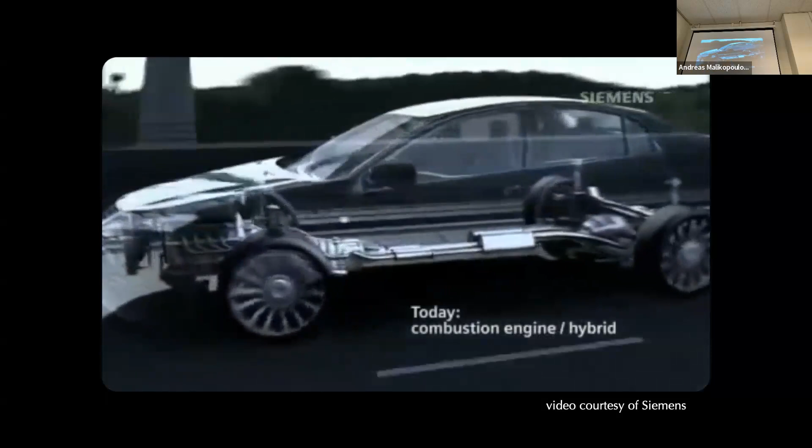The world is changing, and one sector undergoing significant transformation is transportation. We're about to depart from conventional vehicles with internal combustion engines and move to electric vehicles with electric motors and batteries. This transformation provides several challenges and opportunities.

For example, we need to update our current infrastructure with charging stations, and coordinate the increasing demand of electricity to charge electric vehicles. We also have the opportunity to integrate electric vehicles with commercial and residential buildings so we can create off-grid buildings.

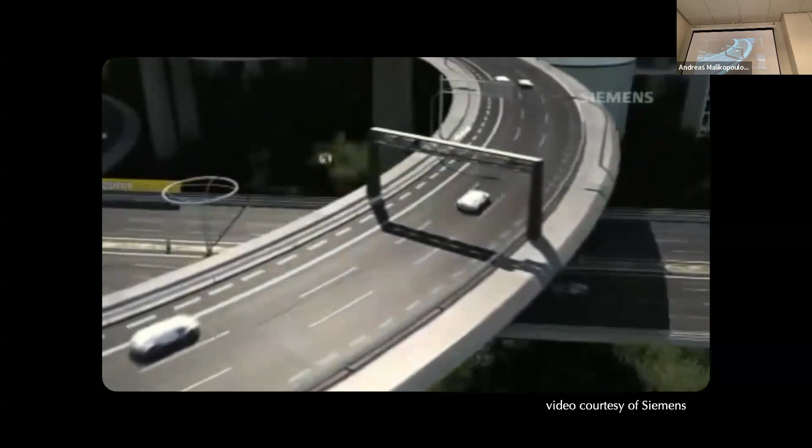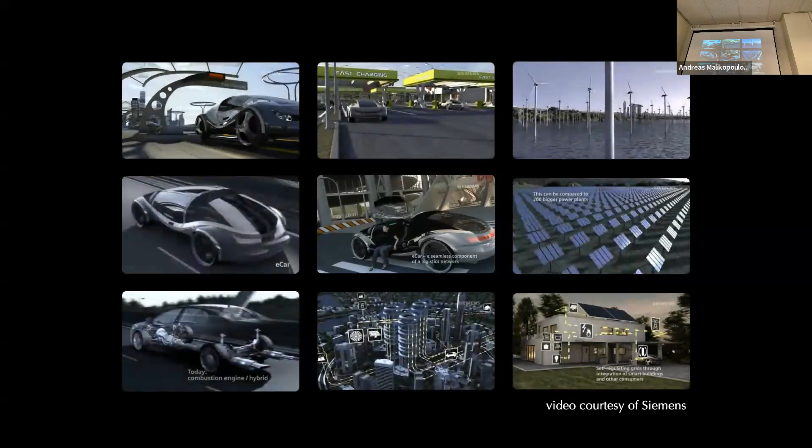At the same time, with connectivity and automation, we can use shared information across vehicles and coordinate them in scenarios like intersections, emergency roadways, and speed reduction zones, improving transportation efficiency and travel time. All these applications share a common theme: there is a cyber component, or information, that we can use to control the physical entities - the vehicles. So essentially we're dealing with cyber-physical systems.

Now, somebody might ask, why focus so much on transportation? Well, in 2017 the US consumed on average 19.96 million barrels of petroleum per day, and transportation accounted for 71% of that usage. This is enough to fill up the Empire State Building over two times per day, just to propel vehicles.

So you can see the impact of transportation on energy, and how we can address this by creating a more sustainable environment. Hopefully, with connected automated vehicles, we have the opportunity to coordinate vehicles and improve transportation efficiency, improve travel time, and come up with a more sustainable mobility system.

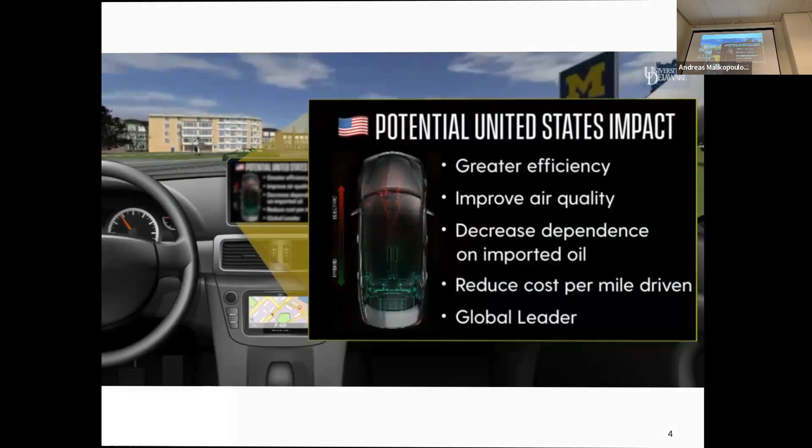So what I plan to do today is go over some automotive and mobility related applications I've worked on in the past using learning techniques and model-based control techniques. Then I will highlight some of the challenges I encountered, and some of the cons. At the end, I will have a few slides to briefly touch on how we can potentially combine learning and control to address these challenges.

Before I get to the technical talk, let me acknowledge the contributions of my students - some of them are here, and some of them are online, I guess.

In the IDS lab, we develop frameworks and algorithms that can make cyber-physical systems able to realize the optimal operation while they're interacting with the environment. In particular, we're focusing on applications related to smart cities, mobility, socio-technical systems, and so forth.

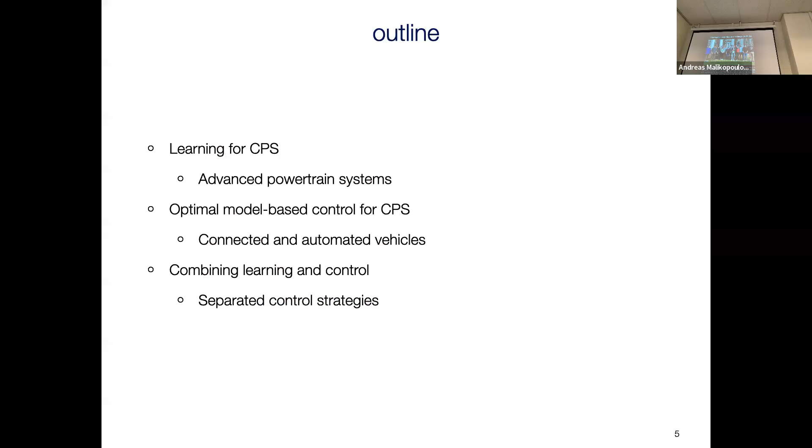To validate some of the concepts we're working on, we have developed a scaled smart city, 20 by 20 feet or 6 by 6 meters, with robotic cars on a scale of 1 to 25. We use this scale testbed to prove concepts related to transportation, how we can coordinate vehicles, and develop first-last-mile approaches.

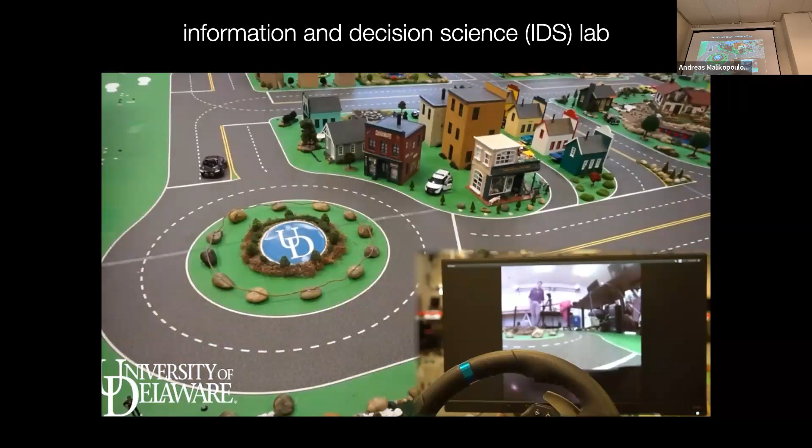We have also integrated driver emulators in our cars, so we can drive the cars inside the city and have a mixed traffic environment with human-driven vehicles alongside connected automated vehicles. We have located sensors and cameras ahead of the cars, so the driver can drive the vehicle and see what's going on through the camera. This is a nice testbed for doing that kind of testing.

We also have several drones that can coordinate with the ground vehicles, letting us explore other applications involving collaboration and cooperation between ground vehicles and drones.

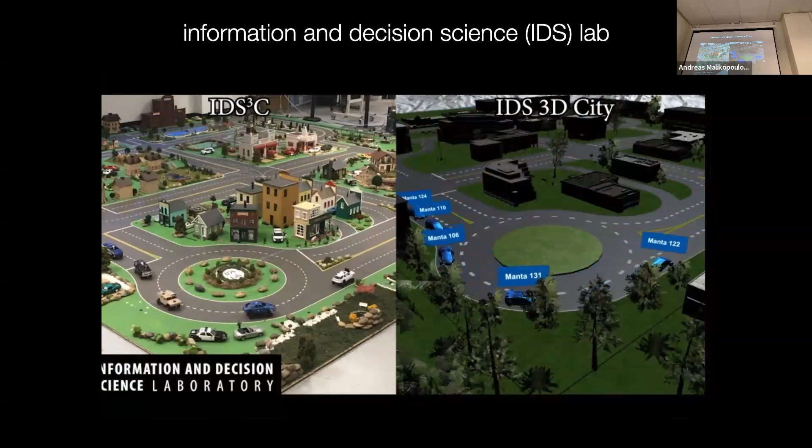We also built a digital twin of this testbed during the pandemic when we didn't have access to the city. My students built this environment in Unity where people can share and develop their approaches. Once an approach becomes mature, they can run a physical experiment in our scale city.

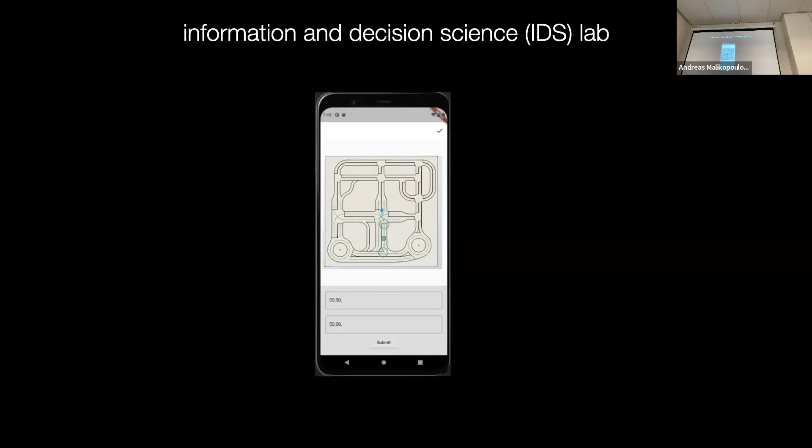We also built an app using students from the computer science department and senior design. They built this app so we can mimic a shared mobility approach in our scale city: we can call a car, it comes to an artificial origin, and we assign an artificial destination. This validates some of the eco-routing work we do in the lab.

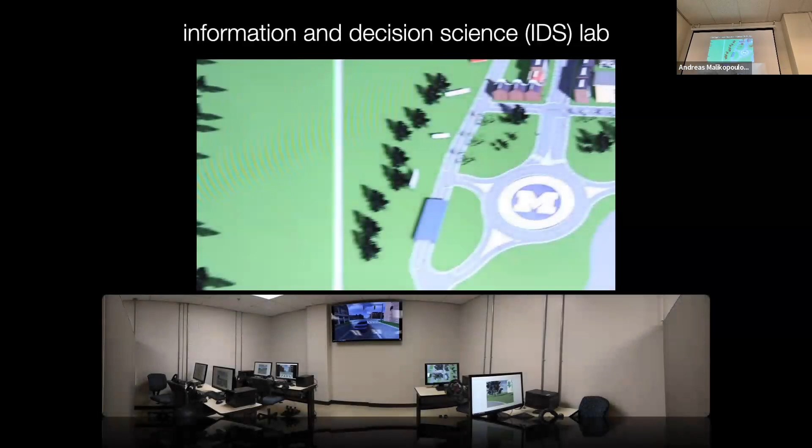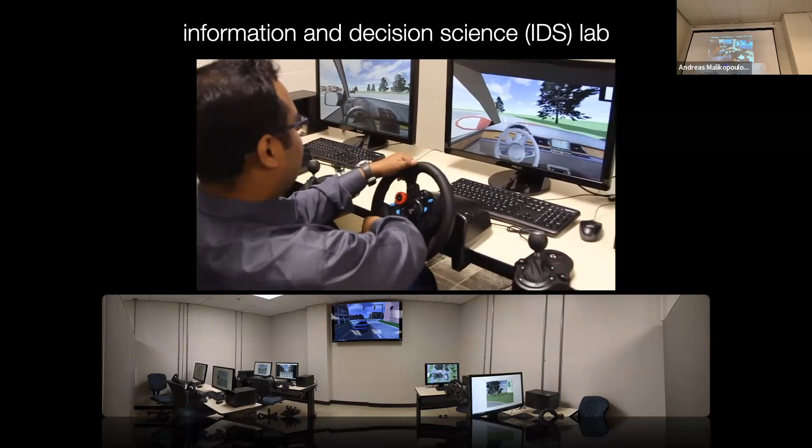We also have a driver simulation testbed with six driver simulators that use commercial software like PreScan, VS Sync, Carla, and others to do some of this work. This is essentially the starting point in the lab—this is where we start—and once we prove concepts, we move to the scale environment.

So with that, let me get back to the technical work. I've been working over the last several years in different aspects of transportation.

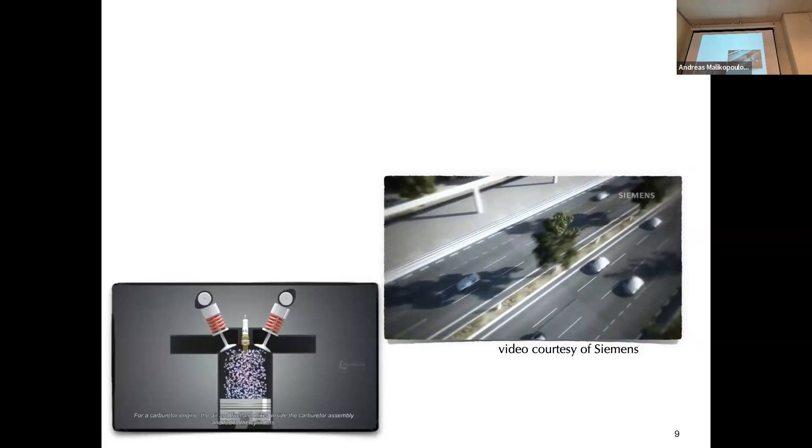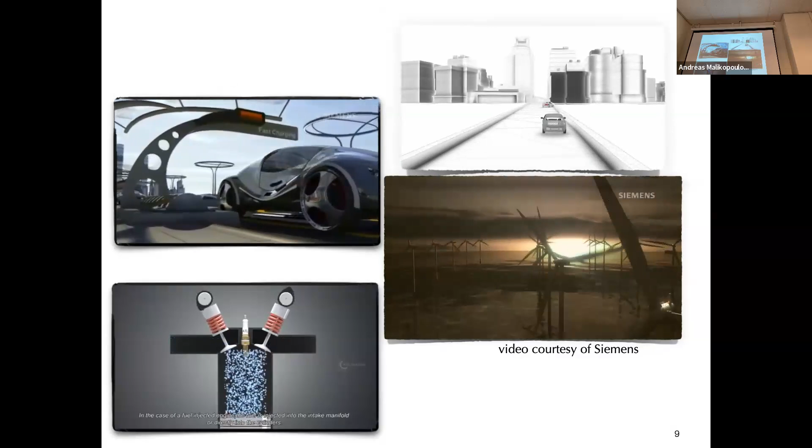I started with my dissertation on how we can make internal combustion engines able to learn the optimal operation with respect to the driver's driving style. Then I moved on to power management control for hybrid electric vehicles and plug-in hybrid electric vehicles. Over the last 12 years or so, I've been working on connected automated vehicles and how we can use shared information to do better control and improve transportation efficiency and travel time.

So what I'm going to do today is walk you through my journey, starting from my dissertation, highlight some of the challenges across these areas, and give you some insights about how we can address these challenges.

My journey started in 2003 when I landed in Detroit to start my graduate studies in Michigan. It was about 11 inches of snow, so the first thing I had to do was buy long johns in Michigan and settle in for the winter weather.

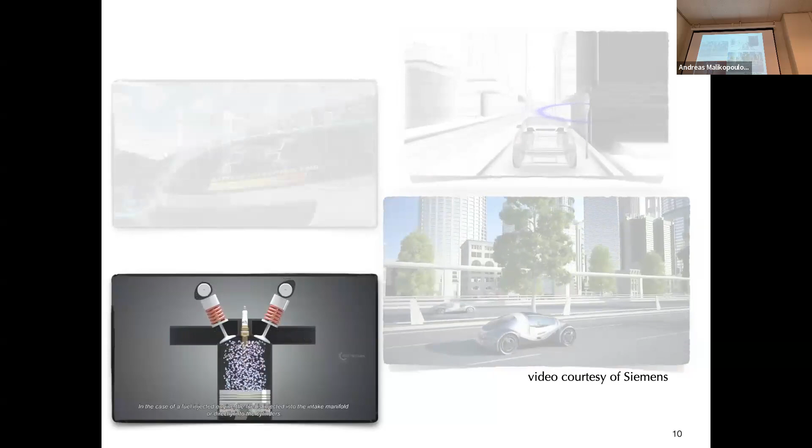The second thing I had to do was find an interesting problem to dig into and identify for my dissertation. So I was reading several articles and journals to identify an interesting problem, and I came across a common question at that time.

Why can't you achieve the miles per gallon posted on the window sticker of our cars? Everybody was complaining about why they couldn't achieve the fuel economy they were supposed to get with their car. I thought this would be a very interesting problem, so I started working on that.

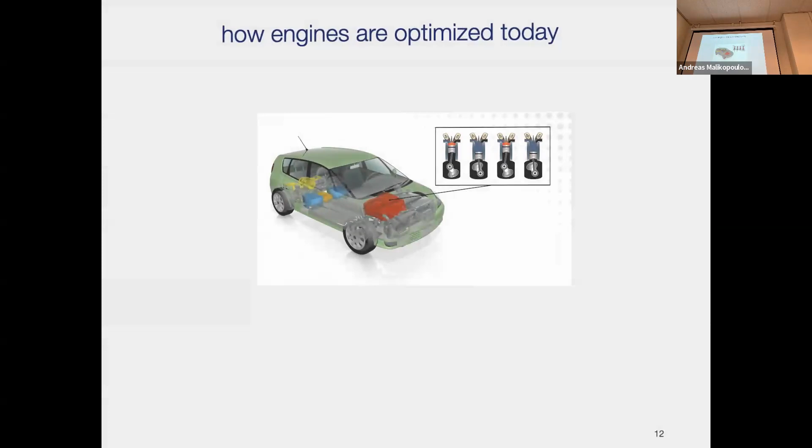To understand fuel economy in vehicles, we need to look at the engine operation. When we buy a vehicle, it comes with a window sticker indicating the fuel economy for city driving and for highway driving. Although we can always get the fuel economy for highway driving, we can barely get these fuel economy estimates for city driving. Let's see why this is the case.

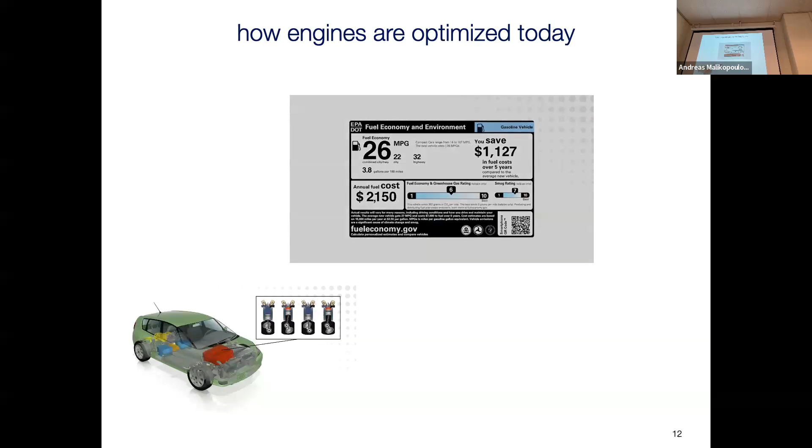So the lower the value, the better, because the lower the fuel you consume, the more power you get. This BSFC map is given with respect to engine torque and engine speed. I'm sorry the fonts are a little small, but hopefully you can see.

The way these are designed, the BSFC map is made by the OEMs: they take the engine operating domain, engine torque and speed, and discretize it into a finite, usually small number of steady state operating points. Steady state means we operate the engine at constant torque and constant speed.

As they operate the engine at steady state operating points, they fine tune the different variables of the engine: injection timing, spark timing, VGT, EGR, whatever is available. Then they take this map and put it in the electronic control unit of the engine, and as we drive the vehicle, we interpolate the values corresponding to these steady state operating points. This is how we control engine operation.

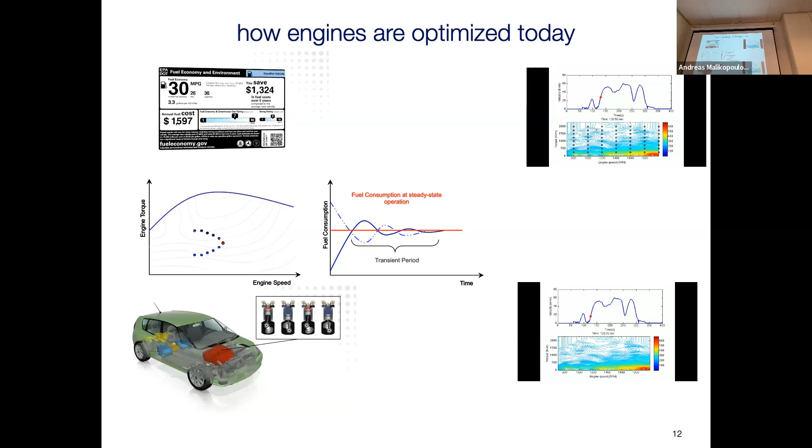Now, to optimize the engine for every different transient case is infeasible, simply because every driver's life is different. You can't really identify all the different cases of different drivers. We have an infinite dimensional space of driving cycles.

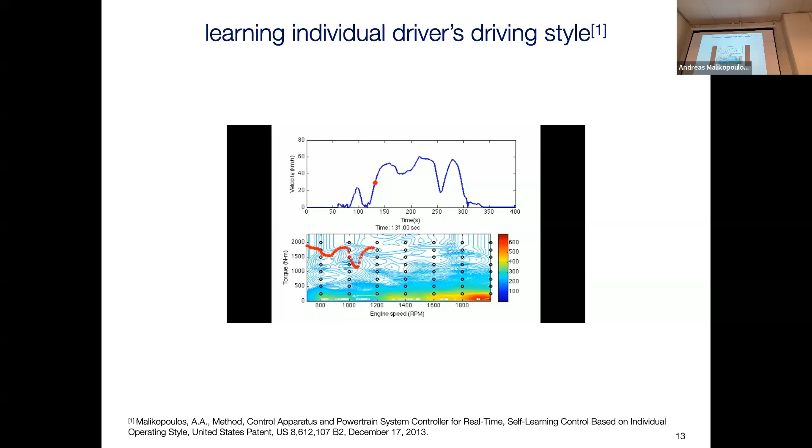So what I did in my dissertation was, instead of focusing on steady state operating points, I focused on engine operating point transitions built on the characteristics of the driver's driving style. I modeled the evolution of the engine operating point as a Markov chain, and developed a controller that can learn the transition probability matrix and transition cost matrix of this model.

Eventually, the implicit assumption was that as we learn the transition probability matrix, we learn the driver's driving style. The more the driver drives the vehicle, the more we learn about the transition probability matrix, and we can apply control to identify the optimal values of the operating points with respect to the driver's driving style.

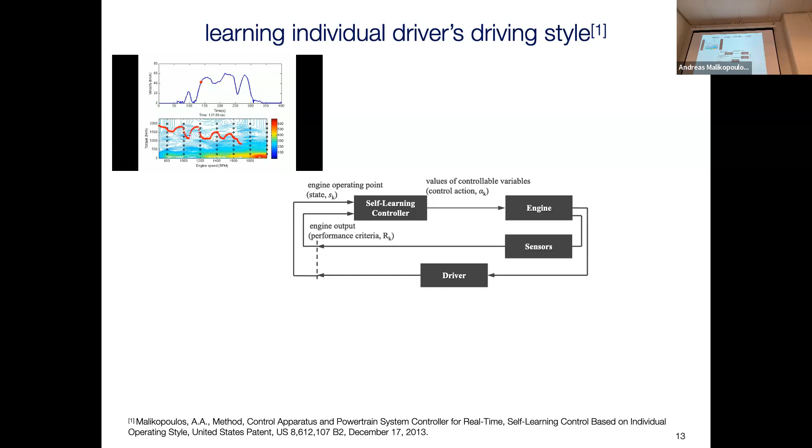So with this approach, as the driver drives the vehicle, the engine can be optimized with respect to that driver's driving style. If any other member of the family drives the vehicle, the engine can recognize and adapt accordingly. Although with this approach we were able to get at least 8% improvements, there are some disadvantages.

For example, when we identify the feasible set to explore the action space, this feasible set changes with respect to environmental conditions. If you identify the feasible action set for injection timing and spark timing for a vehicle operating in Detroit, this feasible set will be different for a vehicle operating in Nevada. So we can't really rely entirely on learning the optimal calibration of the vehicle.

That's a standard disadvantage. So this work was on the traditional ICE.

Yes, this was when you were a PhD. Yes, at that time. Yes.

So Michigan filed a patent on that, University of Michigan, and I heard last year, a couple of years ago, that they have opened discussions to license this technology to a company in Silicon Valley who works on it.

So the idea is how we can make engines learn how to optimize their optimal operation. But the disadvantage is that we can't really rely entirely on it. You need to have an adaptation scheme, and this is going to be my discussion at the end of the presentation: how you can combine learning with some adaptive control to address this problem.

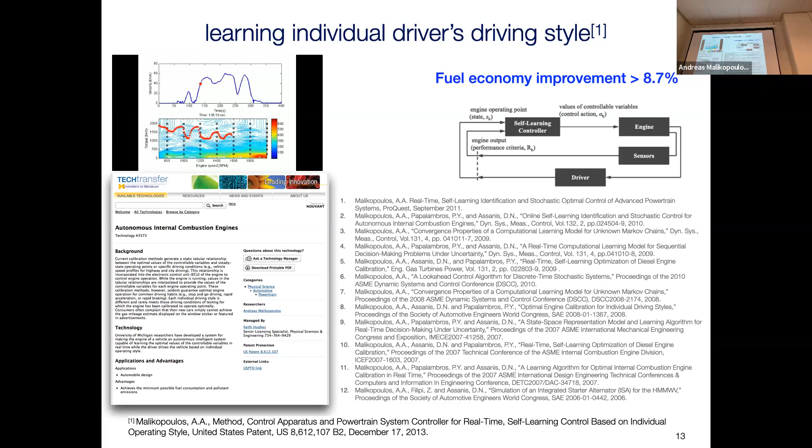So anyhow, after my graduation, I moved to General Motors R&D, and I worked on a similar problem.

The idea is how we can learn the fuel injection characteristic curve of a solenoid fuel injector. They were working on a new combustion technology, and wanted multiple small, precise injections. But these are 4 different fuel injectors, and they have injector-to-injector variation. So if you command a particular pulse width, you get 4 different fuel injections in your engine.

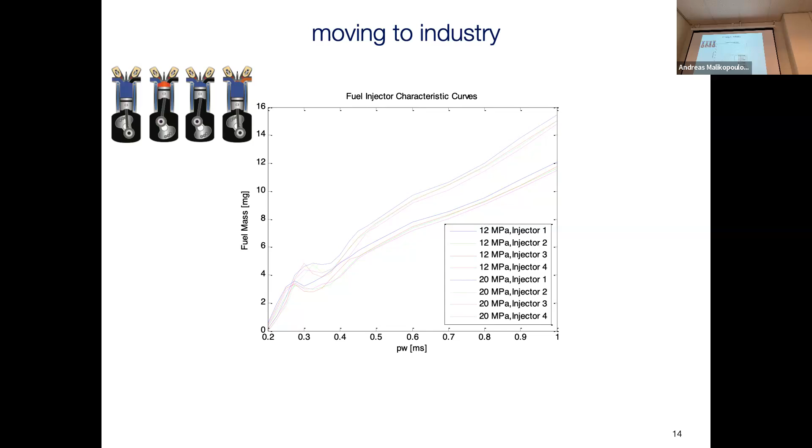So the idea is how we can learn precisely the fuel injector curve, so that when we command the pulse width, we know exactly how much fuel we inject. Eventually, this is a typical identification problem, and somebody might say this is quite trivial. However, the problem was that I don't have feedback control. I can't really measure - if I command the pulse width, I don't have the measurement inside the cylinder to measure exactly what's the amount of fuel that has been injected.

So I used a combination of what we call today deep learning - at that time we just called it supervised learning, it wasn't that fast - just neural networks. We had a bunch of data from fuel injectors, trained on this data, starting with some initial baseline calibration for the fuel injectors, and I was able to learn the exact fuel injector characteristic curve - fuel in milligrams over the fuel cycles of the engine.

However, what I realized is that if I change - I was doing tests in Warren, Michigan, and when traveling to the Milford proving ground facilities, the controller didn't work because I had different temperatures, different environmental conditions. So I had to enhance this approach with some sort of adaptation. Bottom line, I couldn't rely entirely on the offline data to learn the fuel injector curve - I had to enhance my neural network scheme with adaptation and control. That's another point I want to make at the end of the presentation.

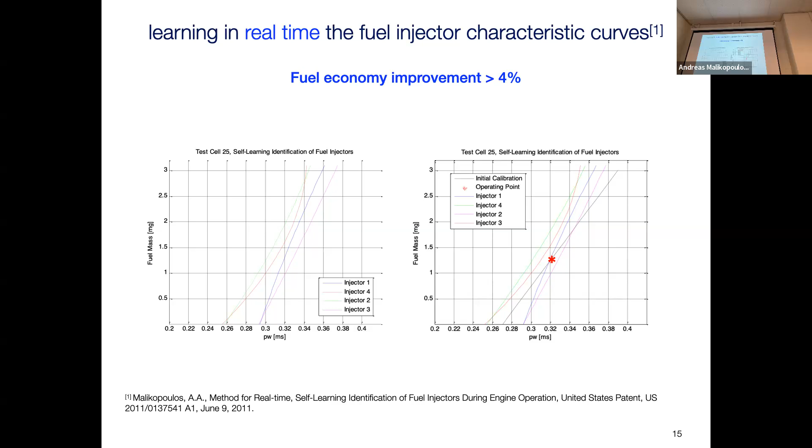And then we have the 2010 volcano eruption in Iceland, right? You might wonder how this is related. Well, at that time, when I was at GM, I was invited to Oak Ridge National Lab to participate in the National Academy of Engineering Frontier Symposium, hosted at Oak Ridge. They had invited several speakers from Germany to participate, and due to this volcano eruption, all the flights from Europe had canceled to the US, so they were missing speakers. So the organizers asked me to give a substitute talk.

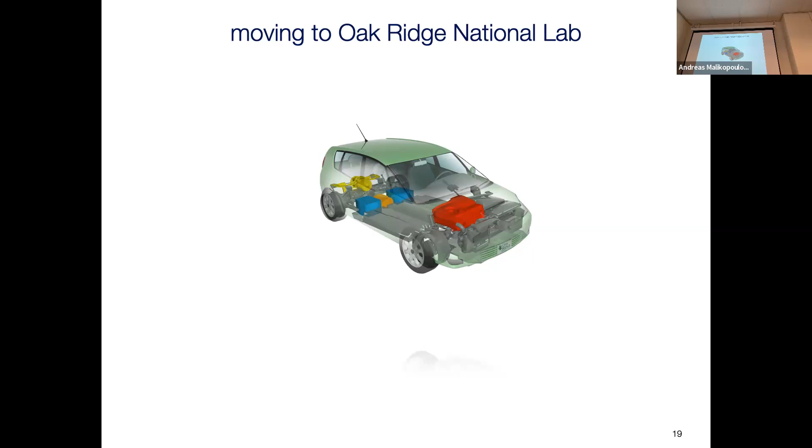And I told them I wouldn't be able to discuss anything about my work at GM. They told me, discuss whatever you want. So I presented my dissertation. Long story short, I ended up at Oak Ridge National Lab - that was my next station. And then, of course, I moved my research topic from powertrain control to hybrid electric vehicles and plug-in hybrid electric vehicles. That was a step function change in my career and research domain.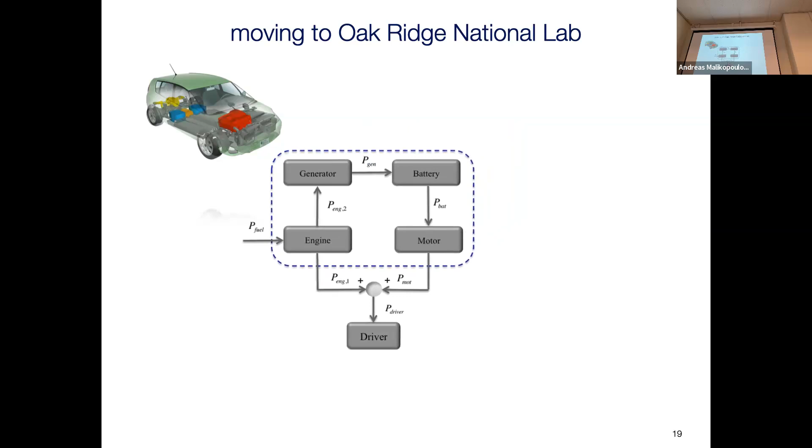So what is a hybrid electric vehicle? With a hybrid electric vehicle, instead of relying entirely on the engine, we have multiple subsystems that can deliver the power demanded by the driver. The driver demand for power can be delivered through the engine, through the motor, or through a combination of that. But all these decisions have to be made in real time as the driver drives the vehicle.

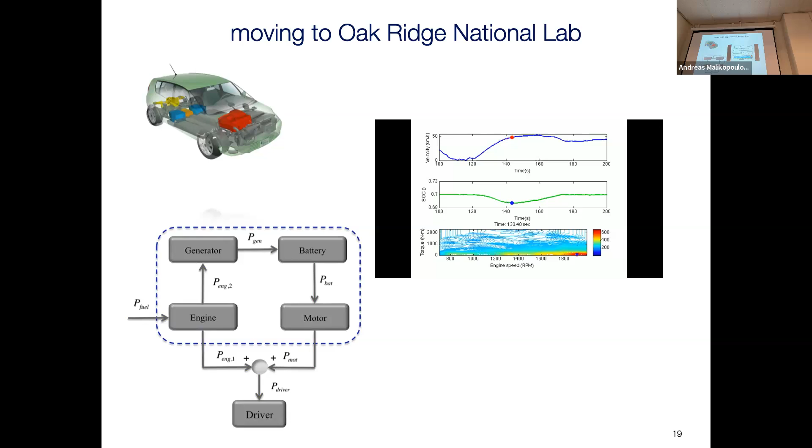To address this problem, we first identify the physical state action space for each of these subsystems, and then formulate an optimal control problem that derives the strategy for how to distribute the power demanded by the driver over the long run, by minimizing the expected long run average cost per unit time. Why pick this cost criterion? We want to maximize the fuel economy, minimize the losses for the long term, as the driver drives the vehicle for days, weeks, months. We could use other criteria for this particular case.

Now, solving this problem isn't feasible in real time, because you can only solve a dynamic problem in real time in a limited way. So what I did was reformulate this as a multi-objective optimization problem by maximizing the efficiency of these subsystems, and I eventually came up with a Pareto frontier. I solved this problem offline for every different realization of the torque demand, and found the Pareto optimal solution.

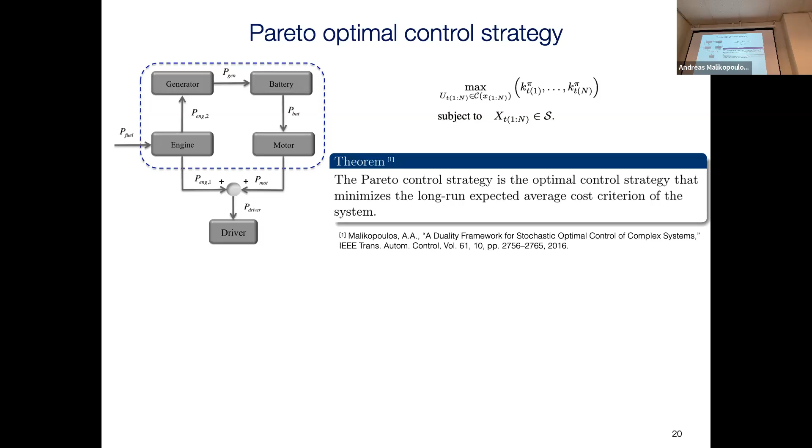And then I integrated with a power management controller as the driver drives the vehicle. Eventually we've shown that we can get the same fuel consumption benefits as we get with dynamic programming. For the dynamic programming, we use a reinforcement learning tool approach. Essentially we have the model of the car and run it over the same driving cycle again and again until we converge to the optimal control strategy.

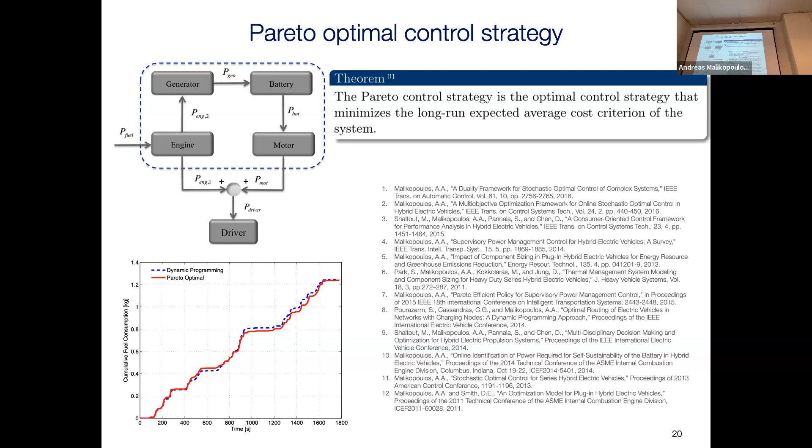And when we compare it with a Pareto optimal solution, as a matter of fact, we implemented this in our demo vehicle. We have an Audi A3 e-tron operated in Michigan, since we don't have space here. That was an ARPA-E project that we completed a couple of years ago. We led this project in collaboration with University of Michigan, Boston University, Bosch, and Oak Ridge National Lab.

Our partner Bosch did the experiments for this case. They ran the power management controller with the Audi's controller, and these are the BSFC maps that I discussed before, the brake-specific fuel consumption map. You can see how the engine operating points are visited all over the place, in particular in high and low efficient regimes. Although with the Pareto optimal solution, we squeezed all the operating points to the most efficient regimes, and this is why we get at least a 12% improvement in fuel consumption. We did multiple tests just to validate these results.

Actually, our industrial partner Bosch.

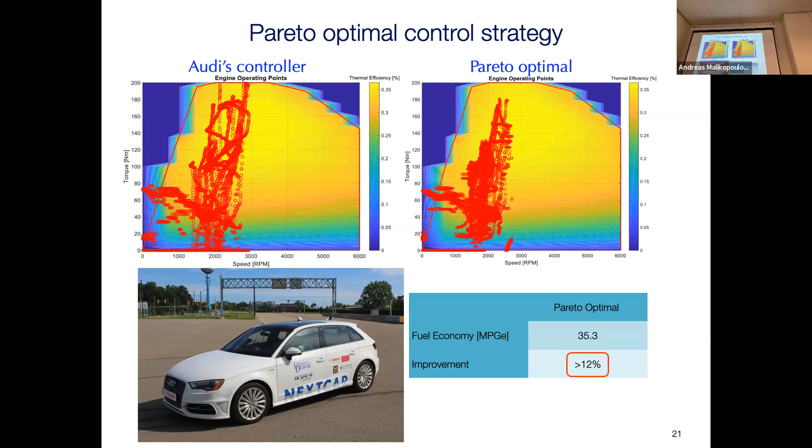We developed this Pareto optimal solution approach for other applications while I was at Oak Ridge National Lab. We had a big project where we 3D printed a building, and attached this building with several renewable resources like batteries and photovoltaic panels, and also attached a hybrid electric car. The idea is to demonstrate with this project how we can have an off-grid building that can rely entirely on renewable resources.

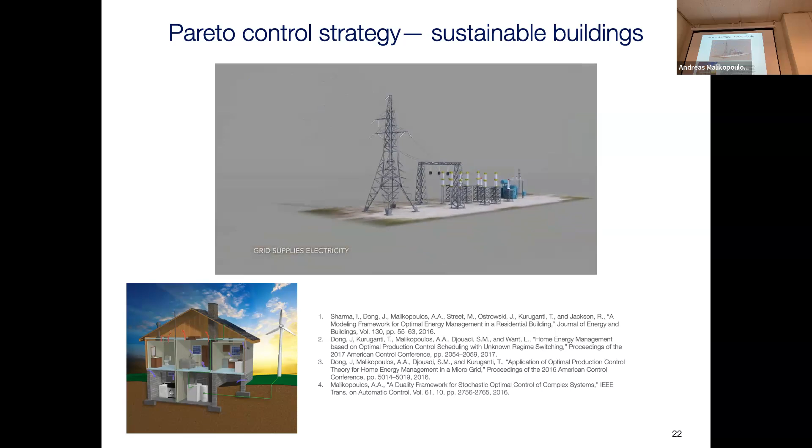But in order to do that, you have to have some power management control. So we developed this approach, and we demonstrated how we can use electricity demand, with some specific bounds, and have it entirely... this is like vehicle-to-grid. Essentially, the car acts as a buffer. You can use energy from the car, or you can charge the car if you have extra energy from the photovoltaic panel or the battery.

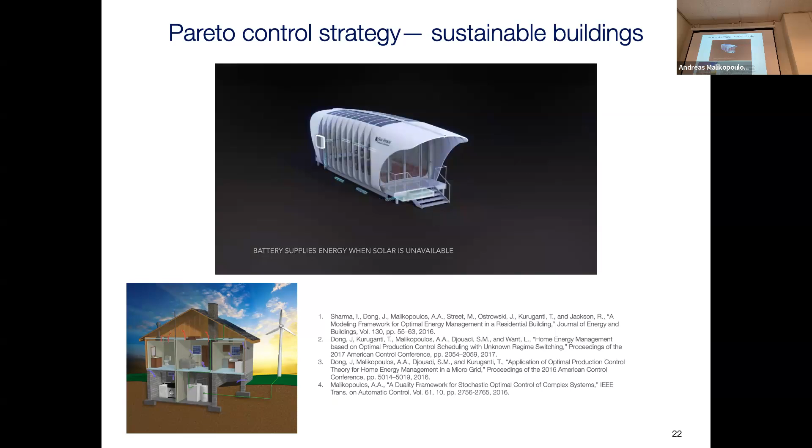That was a demonstration project. Actually, at Oak Ridge, they built the 3D printed building, they 3D printed the car - that was all built at Oak Ridge National Lab. They just bought an engine, and the rest was all 3D printed. This is a big demonstration project at Oak Ridge, 3D printed. They wanted to essentially integrate different technologies from DOE, additive manufacturing, energy systems, and mobility systems - they wanted to have a big demo project.

So that was several scientists and research staff working on this project.

Eventually, while I was at Oak Ridge National Lab working on hybrid electric vehicles, I thought there was an opportunity. At that time, it was 2012, and when people talked about connectivity and automation, they thought about safety only. I thought there might be some opportunities for energy efficiency. So I submitted a white paper at DOE, which was eventually funded, and I started working on how we can use connectivity and automation to improve the efficiency of vehicles.

And what I had in mind was something like this: how we can use shared information from vehicles to avoid congestion. And if you avoid congestion and stop-and-go driving, you get benefits directly in fuel consumption.

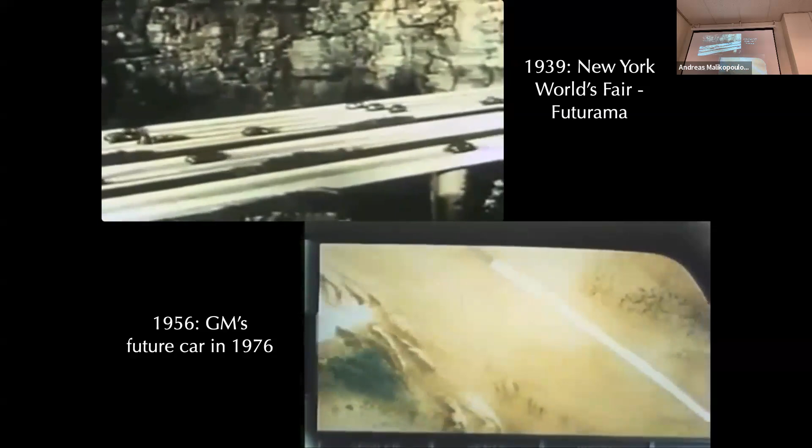So if you think about it, these are not really new ideas. The first ever time they talked about connectivity and automation was in 1939 in the Futurama exhibition, where they had a model for the world, and one subset of this model was about transportation - they envisioned a highly efficient transportation system where all vehicles would cruise at high speeds and safely.

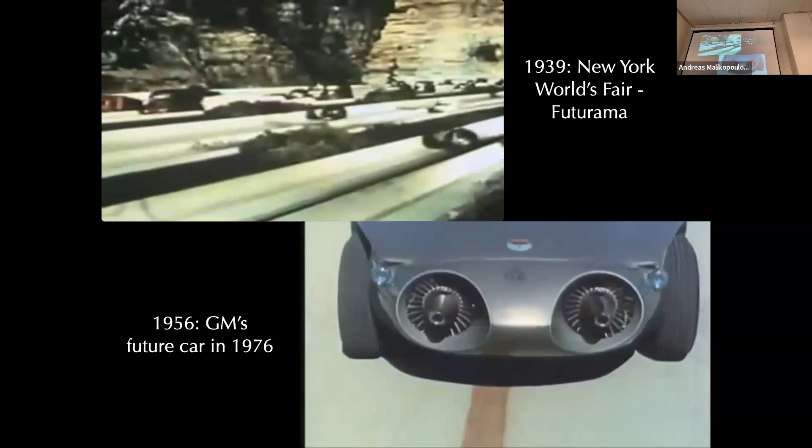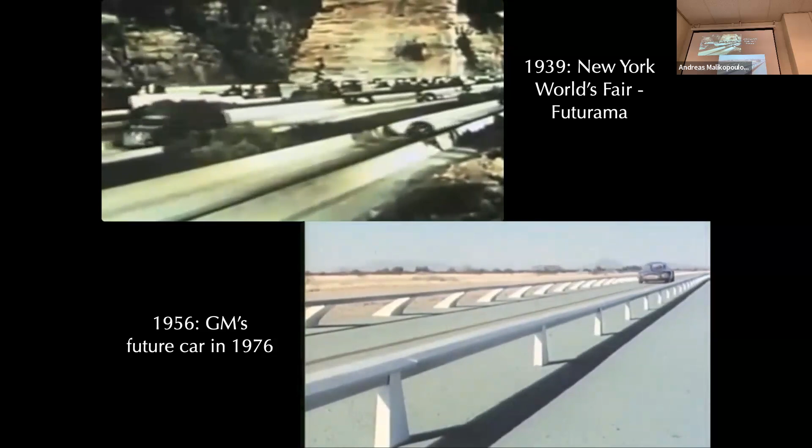In 1956, GM featured the car of the future, 20 years into the future. So the vision of GM was to build a fully autonomous car, which would have all the functionality that you can see here - what we call today GM OnStar, if you drive a GM car. Essentially, the car is fully autonomous. They show a family traveling from Michigan to Chicago, getting information from this GM OnStar system, and at some point it goes completely into self-driving mode, and they show the family enjoying a very nice trip.

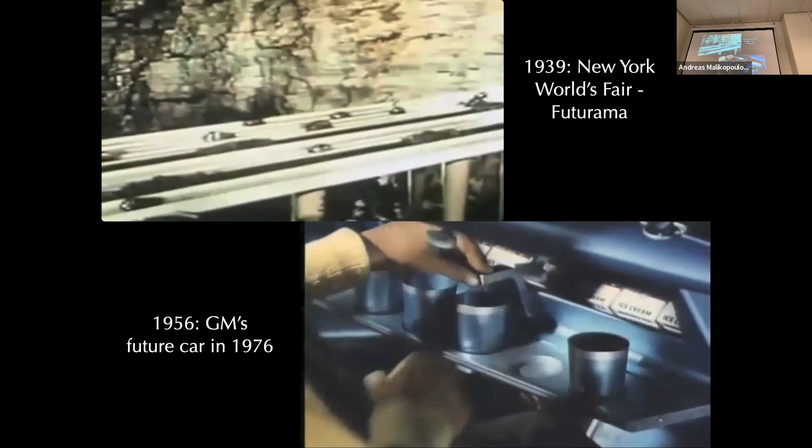The car looks like it has a tail. Maybe you can fly. Yeah, there was the Firebird, the Firebird II. At some point, this car passes the Firebird 1, which was a conventional car, and the family makes fun of the other car because this is supposed to be the future car. If you have the technical center in GM, yeah, they have that. This is the Firebird 1, and when they get past this car, they make fun of it. This is the old timer, they say. That's kind of old fashioned.

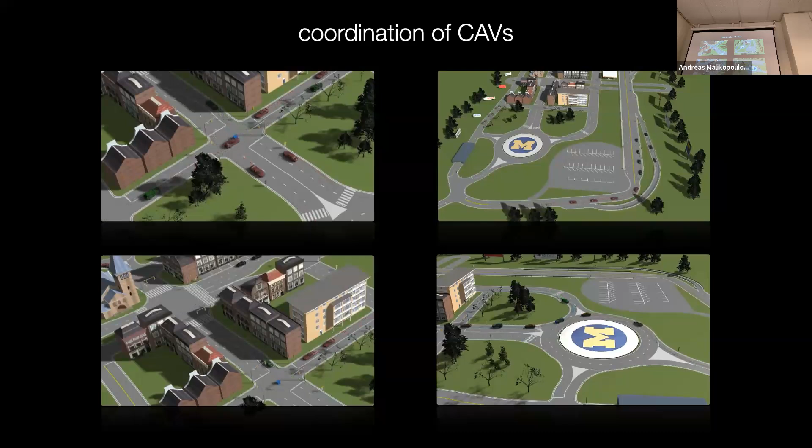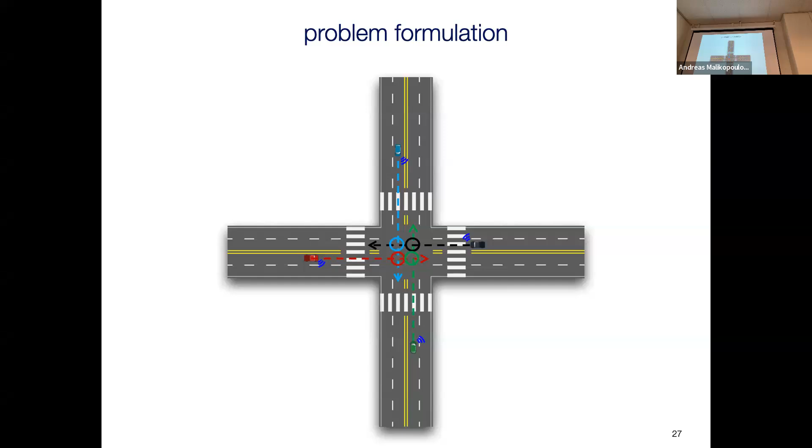Let me give you a little technical flavor on how to address these problems. We will consider an intersection, but this approach can be used in any other transportation scenario, like roundabout, merge way, and so forth. Let's consider that we have 4 vehicles approaching the intersection. If they keep cruising, they will have a potential lateral collision, a potential conflict. So the area at the center of the intersection where we can have a potential conflict, we call it the merging zone. Then we have the so-called control zone outside the merging zone, inside of which the vehicles can communicate with each other and exchange information.

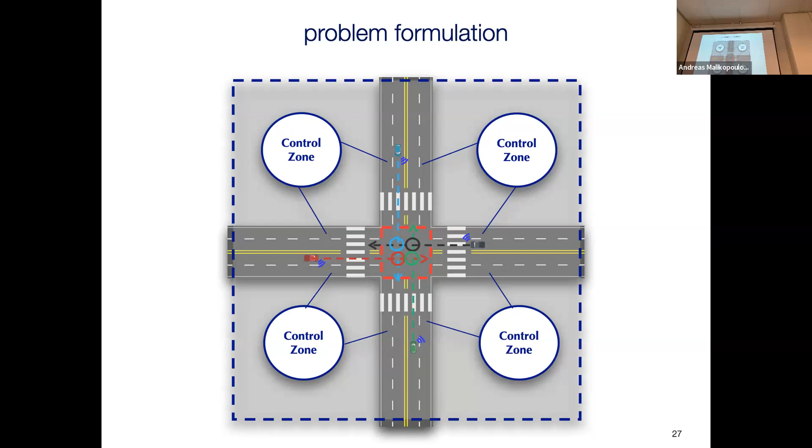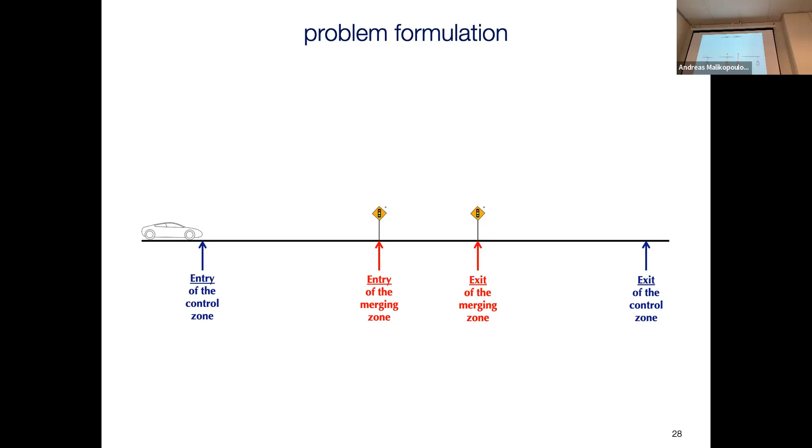So the problem here is once the vehicle enters the control zone, to derive the timing for entering and exiting the merging zone, and then derive an optimal acceleration in terms of fuel consumption so that they can cross the intersection without stop-and-go driving, without any lateral or rear safety concerns, while minimizing fuel consumption. So what we want is that by the time the vehicle enters the control zone, we derive the times to enter and exit the merging zone, and also the exit of the control zone, and then derive the optimal acceleration with respect to fuel consumption.

This is essentially a 2-level problem. In the upper level, we try to identify the timings of the vehicle, so we solve a throughput maximization problem. In the low level, for these times, we derive the optimal acceleration, so we solve an energy minimization problem.

In our approach, we model every vehicle as a single double integrator, where P is the position of the vehicle, v is the speed, U is the control input (acceleration, deceleration), and Si is the distance of vehicle I from vehicle K, which is ahead of vehicle I. Now somebody might argue here and say, hey, that's a very simple model to model a vehicle, and that would be a fair argument.

What we're trying to do here is derive an optimal solution in real time, so we need simple model dynamics that give us this flexibility. However, the way we address these model discrepancies is that once we derive the optimal acceleration profile, we have a PI or PID controller, a low-level controller that can track this optimal trajectory. So eventually we convert the optimal control problem into a tracking signal problem, and this is how OEMs actually design these controllers.

However, this is another point I want to make at the end: the discrepancy between the model-based control approach, which is what we have today here, and the actual systems control, when we have the actual physical system. I'll get to that at the end again.

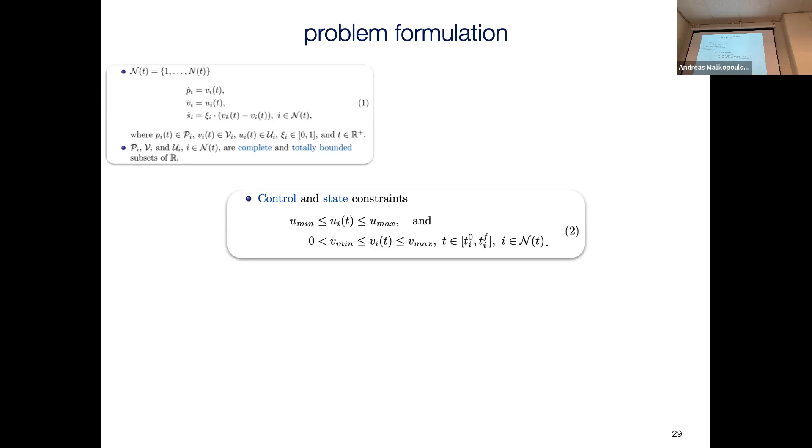Now the next step is to define the bounds of the control and state of my system. For example, for each vehicle we have a specific maximum acceleration and maximum braking capability, so we need to incorporate that into our modeling framework. And from the time Ti naught that the vehicle enters the control zone until Ti f that the vehicle exits the control zone, we impose some speed limits for the vehicle.

Then we address the rear-end safety constraint, where essentially for each vehicle I, we demand that the distance from the preceding vehicle K should always be greater than or equal to some safe distance delta I, which is also a function of the speed of the vehicle, since the higher the speed, the longer the distance we need to maintain from other vehicles.

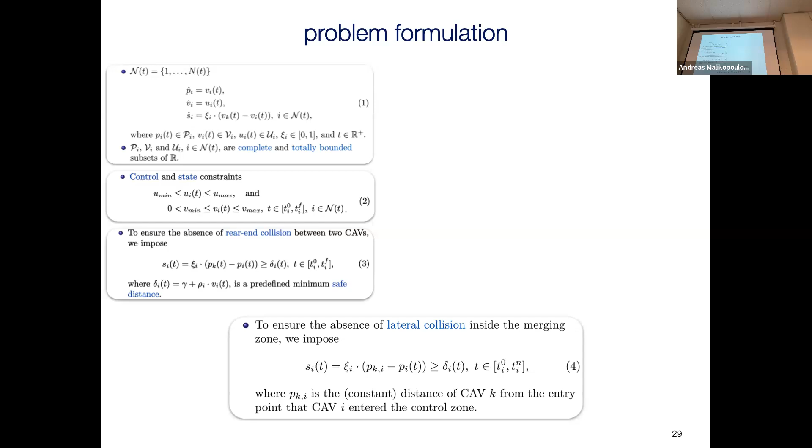And finally, we impose the lateral safety constraint, where essentially the vehicle should have at least a distance delta from the vehicle crossing vertically the intersection. With this in mind, we can formulate our optimal control problem, which is minimizing the L2 norm of the control input from the time Ti naught that the vehicle enters the control zone until the time Ti f that the vehicle exits the control zone.

Now, somebody might argue, how in the world is this an energy optimization problem, since you optimize the L2 norm of the control input, which doesn't have any energy units, right? If you remember from the first part of the talk, when we minimize transient engine operation, we minimize fuel consumption. So essentially, this is what we're trying to do here. We minimize the L2 norm of acceleration and deceleration, minimize transient engine operation, and if you do that, you get benefits in fuel consumption.

Now, to solve this problem, you formulate a Hamiltonian analysis by adjoining the Lagrange multipliers with all the inequality constraints.

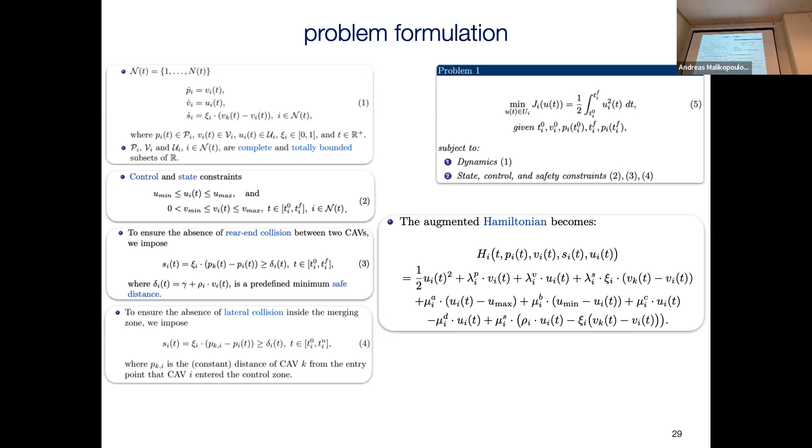Yes, so this process seems like a centralized way. You have access to all these vehicles in the vicinity and you can control that. But in reality, it's distributed. So actually, this is not centralized, it's decentralized. Each vehicle solves this problem on its own. Every vehicle solves this problem and derives this optimal control policy on its own, without any centralized supervision. They only have access to some information available to all the vehicles through a coordinator. So every time a vehicle enters the control zone, it knows the existing information about the vehicles and solves the problem, but the solution is derived by each vehicle directly.

Oh, I see. Now, if none of the state, control, or safety constraints become active, then you have a nice closed form analytical solution, right? That you can see here.

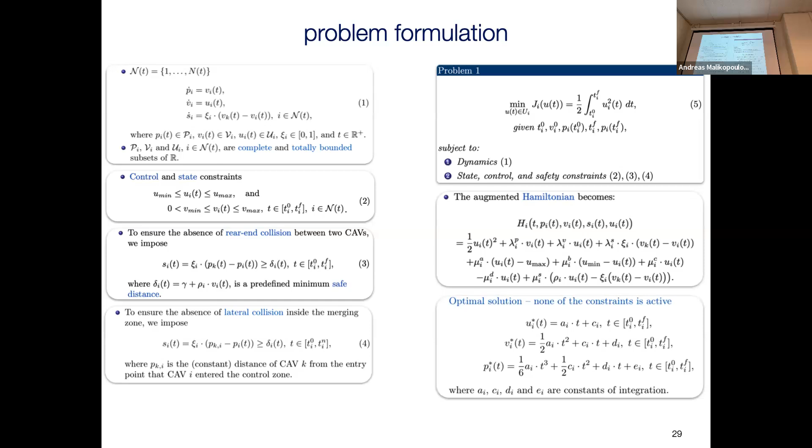However, if any of the state control constraints become active, then things get complicated. Let me just give you the flavor. I'm going to move a little bit faster here.

So this is the case where none of the constraints become active, and you have a very nice closed form analytical solution. However, if any of the state, control, or safety constraints become active, then you need to piece the unconstrained and constrained parts together, which gives you a set of algebraic nonlinear equations that you have to solve simultaneously to compute the junction points and also satisfy the Euler-Lagrange equation. This means you can no longer have a closed form analytical solution — you need numerical solutions like steepest descent and so forth, which means you cannot really implement this in real time. And even if you get the solution, you might hit another constraint down the road, so you have to repeat this process.

Just to give you another layer of detail about the complexity, let's consider the rear-end safety constraint becomes active. If this becomes active, we impose some discontinuities in the influence function of the Hamiltonian analysis. To address these discontinuities, we need to adjoin the Lagrange multiplier with the partial derivative of the rear-end constraint with respect to the state, and adjoin this to the influence functions. Then we end up with a set of algebraic equations that looks like that, which can essentially only be solved by numerical methods.

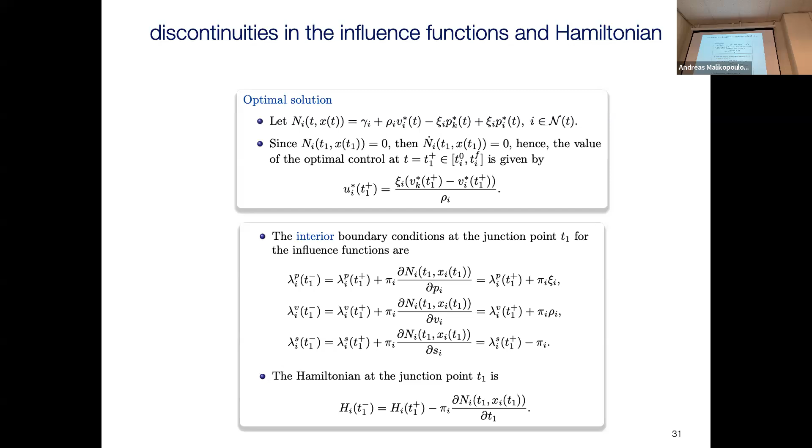So anyhow, to address this issue, the idea is how we can come up with a solution that can never activate any of the state, control, or safety constraints. To address this problem, we start with the optimal solution of the unconstrained case, which is a nice cubic polynomial.

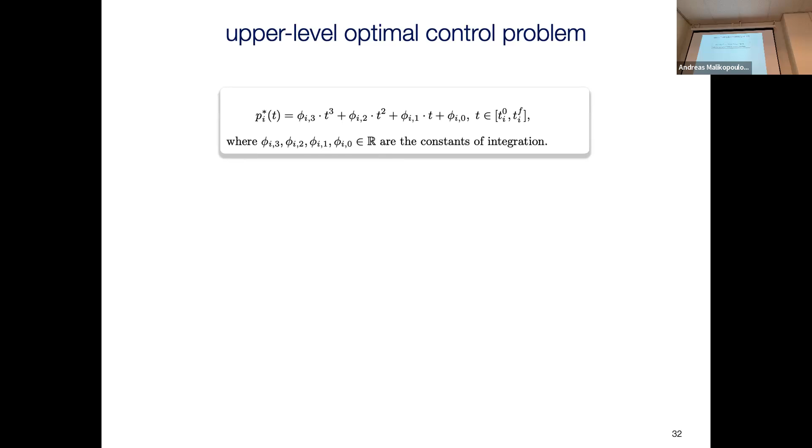Now, if you observe this polynomial, you see that it's a real function polynomial, strictly increasing — this is how it looks like. And it's differentiable, which means it's a one-to-one function, so we can find the inverse of this function. As a matter of fact, you can apply Cardano's method and find the inverse function, which we call the time trajectory of the vehicle. The time trajectory gives you the time of the vehicle with respect to the distance, the position.

So if we have this time trajectory, and assume we have all the time trajectories of existing vehicles inside the control zone, then once the vehicle enters the control zone, it has access to all the existing time trajectories. Now, what the vehicle can do is derive this time trajectory for its own to avoid intersecting any of these time trajectories. If it does so, this implies that we don't activate any of the state control constraints. Once you derive this optimal trajectory, you invert back, and this is now the optimal solution of the low-level problem.

So essentially, with this approach, we have shown both the upper level and the low-level approach.

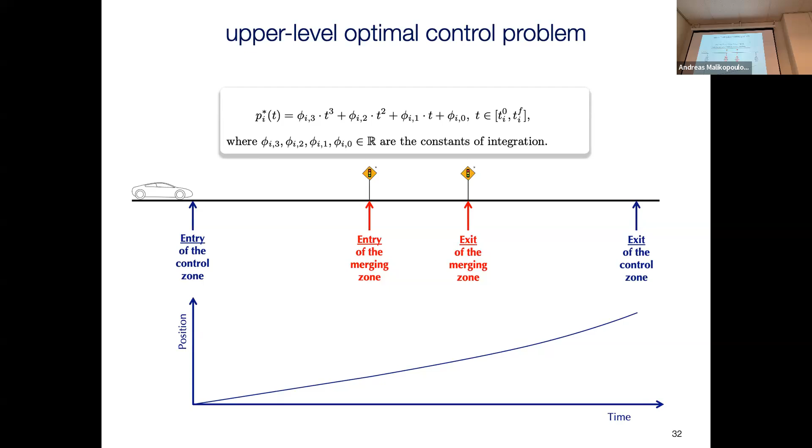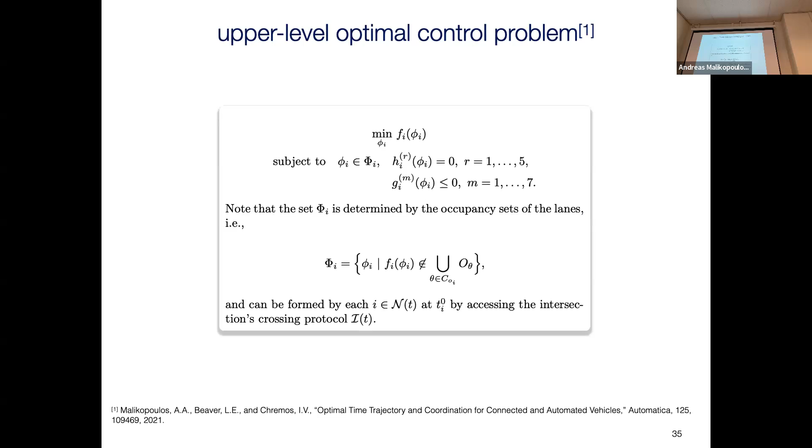I'm going to skip these details. Essentially, this is the mathematical interpretation of what I just told you. Eventually, we end up with a nice optimization problem where we can show that this problem is convex and there's no duality gap, which you can use to solve it in real time.

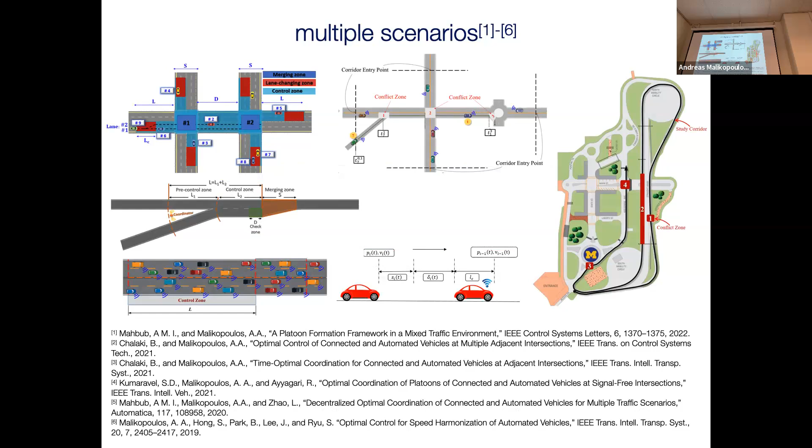Let me show you some simulation results that we did. We applied this approach in different scenarios: intersections, merging roadways, and corridors. This is an experiment in our scale city with an intersection.

Several vehicles approaching the control zone start deriving the optimal acceleration-deceleration profile to cross the intersection without stop and go driving, as we will see.

We also apply this to a corridor that included a roundabout, a merging roadway, and an intersection. We have about 15 vehicles in this scenario. You can see how the vehicles navigate through this traffic without stop and go driving and without congestion.

Of course, if you ask what happens if we increase the number of vehicles, then at some point we will have congestion because we reach the maximum capacity of the road. There's nothing you can do about that directly. Actually, there are two things you can do: you can either increase the speed limit to rush vehicles through the scenario, or increase the control zone. But in both cases, you have limitations.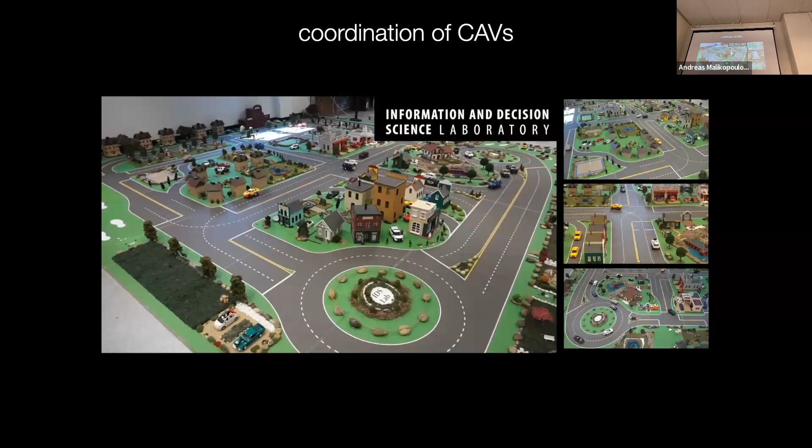We also applied this in our demo vehicle, the Audi, at the University of Michigan MCity. The way we did this experiment, perhaps you know, MCity has augmented reality, so you can have the physical entity in the field, and then you can create virtual vehicles broadcasting with this physical entity.

So we use this scenario: we have the Audi alone in the field, but the Audi is broadcasting with virtual vehicles that you can see on the left of your screen, the black vehicles. At the top, we have the baseline scenario without connectivity or automation.

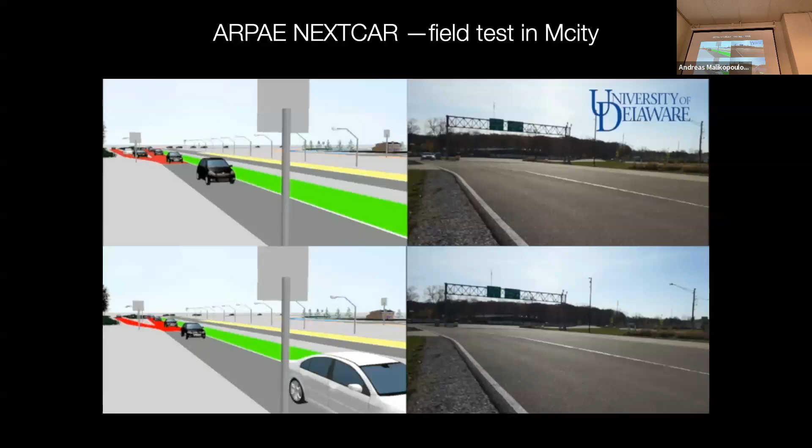At the bottom, we have the scenario that runs with our control algorithms. You can see that as the Audi approaches the ramp, it broadcasts with the virtual vehicles, the black vehicles, and gets to the merging zone without stop and go driving. So it eliminates this stop and go.

Although in the baseline scenario, the virtual vehicles block the Audi, so essentially the Audi is sitting there doing nothing. That's the kind of approach you can use, and you get several benefits in terms of fuel consumption.

To quantify the benefits, we did a chassis dyno test. This is again the scenario: we put the Audi on a chassis dyno at the Bosch facilities, and then we drive the Audi through the virtual environment of MCity.

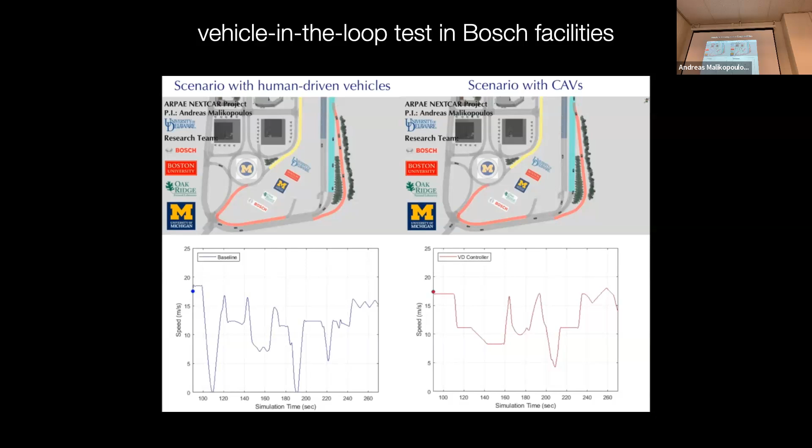On the left, you can see the baseline scenario where we have no connectivity and automation. On the right, we have the scenario with connectivity and automation. Here's the Audi on the chassis dyno going through the scenario.

You can see in the baseline scenario we have stop and go driving, right? Because there's no connectivity. Although in the scenario where all the vehicles are connected vehicles, we have eliminated the stop and go driving, and we can sort of mimic free flow, right?

Through this approach, you get benefits ranging from 13% all the way to 34% improvement in energy.

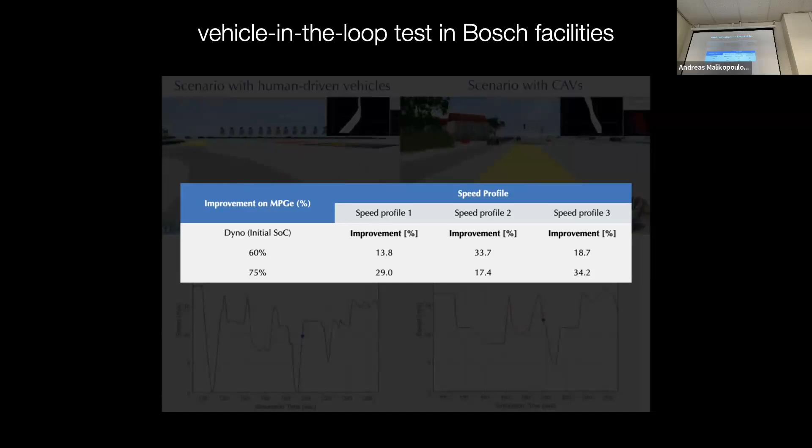Now, if you do the following experiment: check out the sticker posted on your window about the fuel economy estimates, and compare the estimates for city driving and highway driving. If you compare these, the difference ranges between about 15% and 35%, depending on the car you have. So by eliminating the stop and go driving, essentially we translate city driving to free flow driving, and we get these benefits.

So just to synthesize what we've seen so far, we've seen the model-based control approaches, where you have a discrepancy between the model and the actual system. So we cannot really, with these approaches, guarantee high performance guarantees. We see that in the case of model-based control, we have to develop a PI or PID controller to control the vehicles.

If you use reinforcement learning techniques, you may have implications in the robust operation of the vehicle. We see that in the car, in the engine calibration. If you apply directly a reinforcement learning technique, the physical system might end up stalling the engine or creating implications with the robust operation.

On the other hand, if you use supervised learning approaches, you cannot really have performance and safety guarantees, just because by only using offline data, you need to augment this with some sort of adaptive control approaches, and we did that. We see that with the fuel injector characteristic curve. So the idea is how we can combine both.

Let me take a few more minutes to give you the flavor of this approach. So let's consider that we have an actual CyberPhysical system. And for this CyberPhysical system, we have some sort of noisy observation of the state, right? And we have also a model of this system. It can be any model.

Now, the idea here is to establish an information state which depends on both the actual CPS and the model CPS. And if we show that the evolution of this information state does not depend on the control strategy, then we can use this information state to derive offline the control strategy using the model. However, since this information state includes some information from the actual CPS, this control strategy should be parameterized with respect to every realization of the state of the actual CPS.

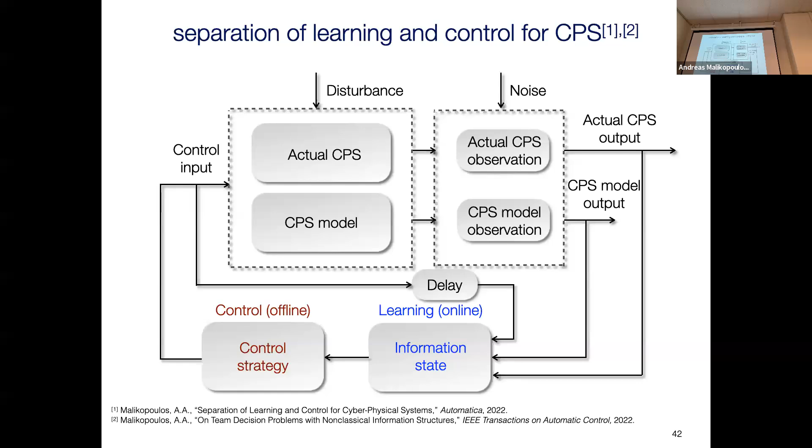Now, if we implement this control approach to our system, then as we collect data, we can start learning the information state. And eventually, the optimal control strategy that we derive offline will become optimal for the actual CPS as well.

Now, let me give you one more layer of details. Let's assume that we have an actual system with some unknown dynamics, so F hat is unknown to us. In this system, XT hat is the state of the system, UT is the control input, and WT is the disturbance, or a random variable defined in an appropriate probability space.

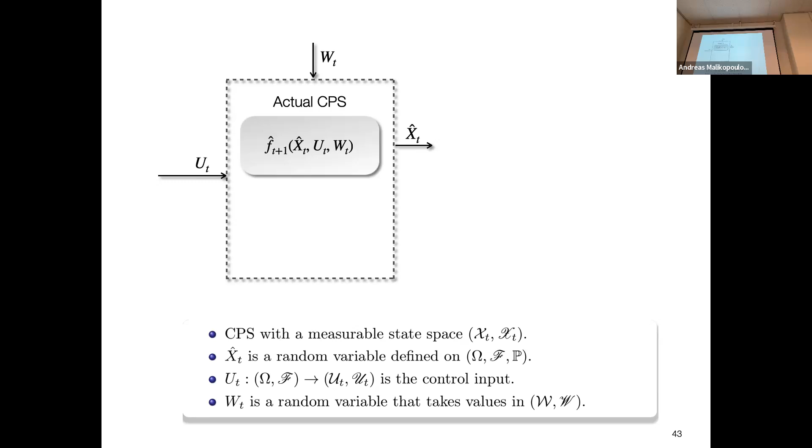And then we have also some noisy observation of the state, where Z is another random variable defined in an appropriate probability space. Now, this is the actual CPS, and the problem here is to derive an optimal control strategy to minimize an expected total cost criterion, right?

However, to solve this problem is infeasible, just because we don't have the actual dynamics of the system. So what typically we do here is we have a model of the system, right, a simple model. We derive the optimal control strategy, and then we implement it to the real system, with the known implications about the discrepancy and performance guarantees.

Now, what we want to do in this approach is attach to our actual CPS the CPS model. We run essentially the CPS model in parallel with the actual CPS. And we establish an information state, which is some statistics - a conditional joint probability distribution of the state of the model and the state of the system, given all the history of the model.

Now, if we can show that the evolution of this information state does not depend on the control strategy, then we can use this information state to derive the optimal control strategy by using the model. However, the information state has some information about the state of the actual system, which is not known to us, because this is an offline process, right? So when we eventually solve this problem, the control strategy will be parameterized with respect to every realization of the state of my actual system.

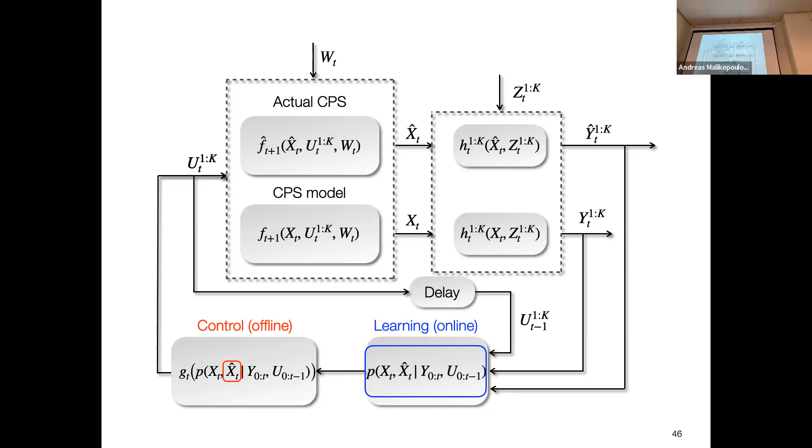Now, once I start implementing this control strategy to both the actual CPS and the model, and I run this, I start collecting data and learning the information state online. Once the information state becomes known, the control strategy that I derive offline becomes also optimal for the actual CPS. In the first result, what I'm showing here - I'm going to rush a little bit more because I'm running out of time.

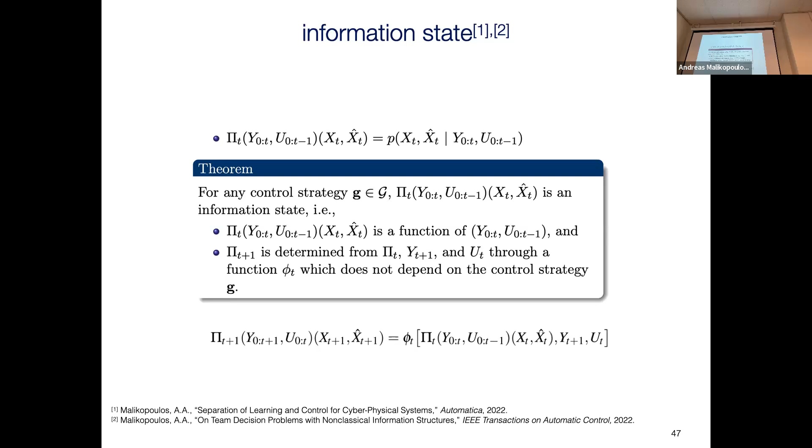In the first result, we just show that this information state is a valid information state and its evolution does not depend on the control strategy, right? Once we establish this result, then eventually, this is the initial problem that we are addressing of the actual CPS. We reformulate this problem by attaching an error between the realization of the state of the actual system and the state of the model.

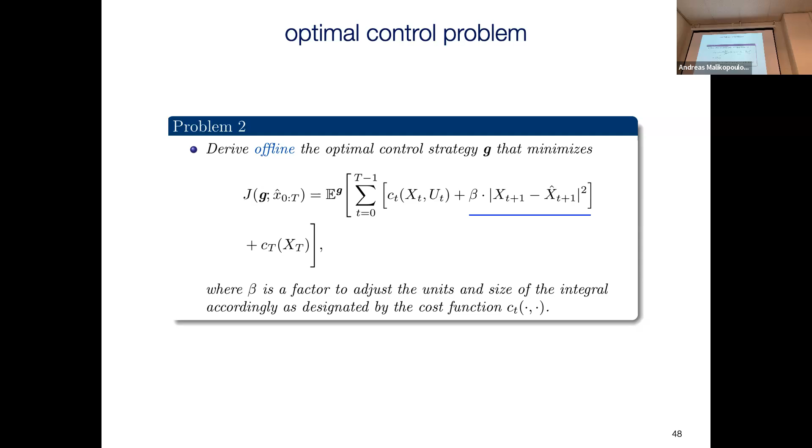We penalize that, and we solve this problem offline using the model. We derive a local control strategy, and this control strategy is parameterized for every different realization of the state of the actual CPS. And we can show eventually that this control strategy that we derive offline is optimal for the actual CPS.

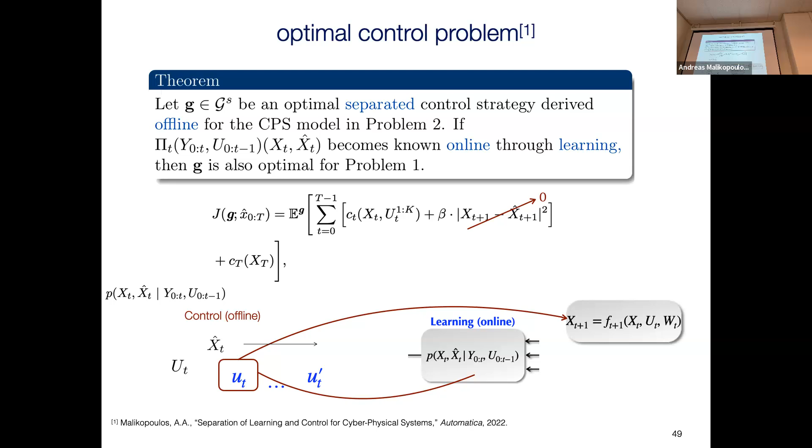Just to give you some intuition about this, imagine that we solve this problem offline, and we have for every realization of the information state, a vector of control inputs corresponding to different realizations of my actual system state. As I start learning the information state, I just select those control actions that eventually make my model match the actual system. Once this happens, the optimal control strategy corresponds to the cost of the actual CPS. That's how you get to the desired result.

Eventually, we hope that this approach can address problems in cyber-physical systems, which will have a massive amount of data that can arrive in real time and not altogether in advance. So by combining learning and control approaches, we can address some of the issues that I tried to outline in the first part of the talk when I showcased some of these challenges.

So with this, I would like to thank you for your attention. I'd be happy to take any questions.

Pleasure, go ahead, very nice talk. So I have a question about the real implementation of this approach, practical. If you want to have all the inputs resolved, I assume you are doing some V2X with some infrastructure to support that. But what if some vehicles are unequipped and don't have any device to provide that? Would that be a problem for your approach? Yes, so what you see, we assume that all the vehicles are connected and automated. Yes, you have 100% penetration. Yes, this is the solution.

Now, for the case that we start deviating from full penetration of CAVs, we apply different approaches. This approach is no longer valid, you have to incorporate heuristics for this. But the way that we approach it, we have two different ways. First, we try to use the CAV and learn from the human vehicle how it behaves, and then account for this in our control. Or, use the CAVs to form platoons of vehicles and then control the entire platoon. Imagine platoons of vehicles, of human vehicles, led by a CAV. So if you start controlling the CAV, you can start forming platoons, and then you can control all the platoons altogether.